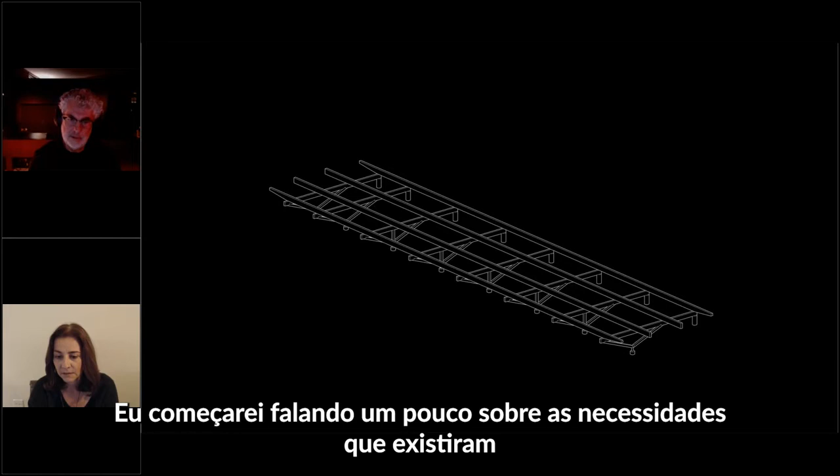I will start talking about the necessity of being in a remote piece of land that was totally disconnected from any water or electricity supply. Sustainability was something that was necessary, so the first thing, when we thought about how to assemble the house, was to create a structure that could be fully produced in a factory and then brought to the site and assembled in a very fast and clean way.

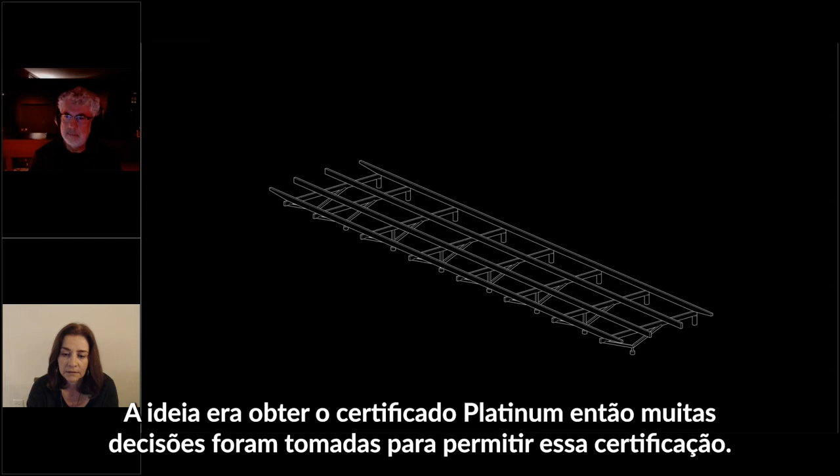The idea was to reach the platinum certification, so many decisions were taken to allow this certification to happen. The first thing was to keep the land in a very permeable way, so we touch the land in very few points. There are some concrete supports that hold the structure, and from those supports above, it's fully a wood structure.

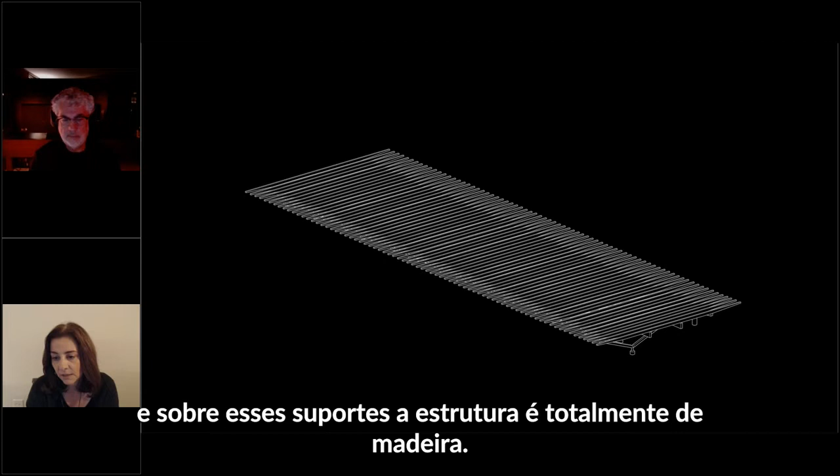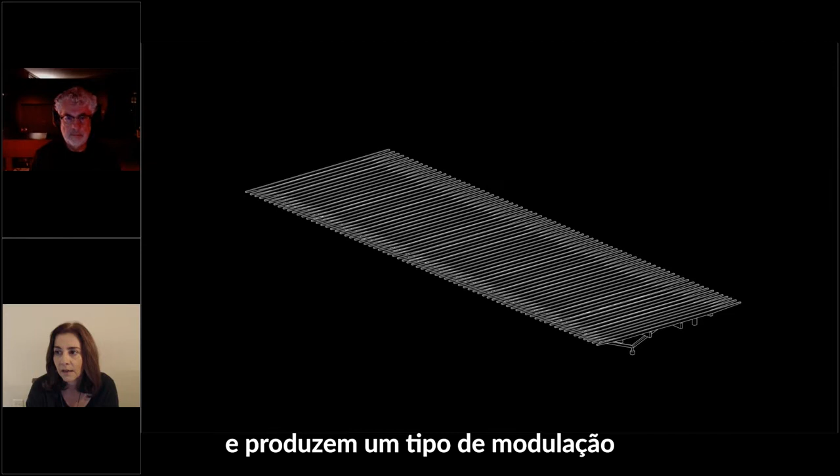The first slab is not a slab, it's a floor structure that holds almost the full house. From that floor structure we have the columns raising, producing a rhythm, a kind of modulation that can sustain and organize the program of the house. I think the slides are passing very slowly, I'm sorry about that. So now you see the full structure.

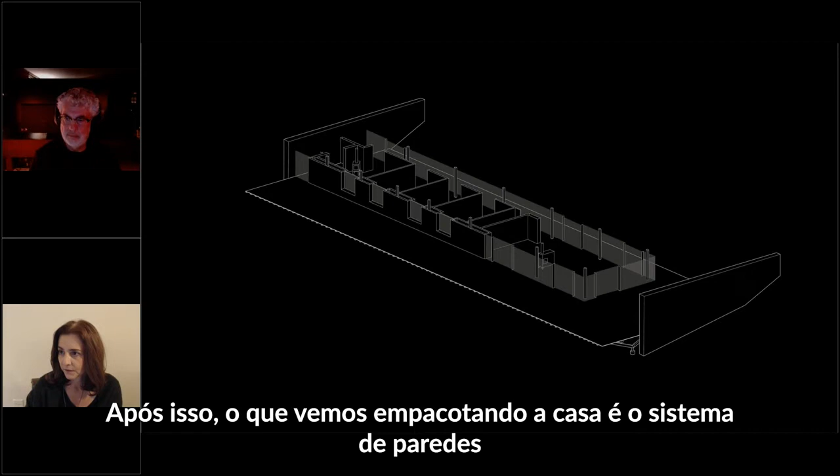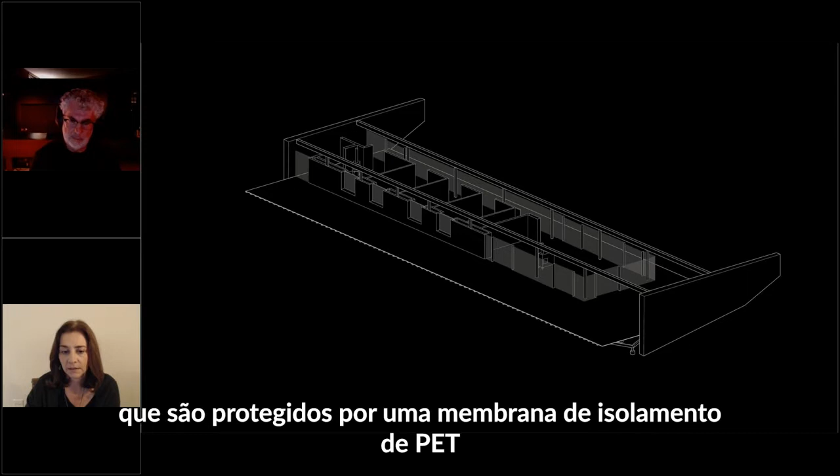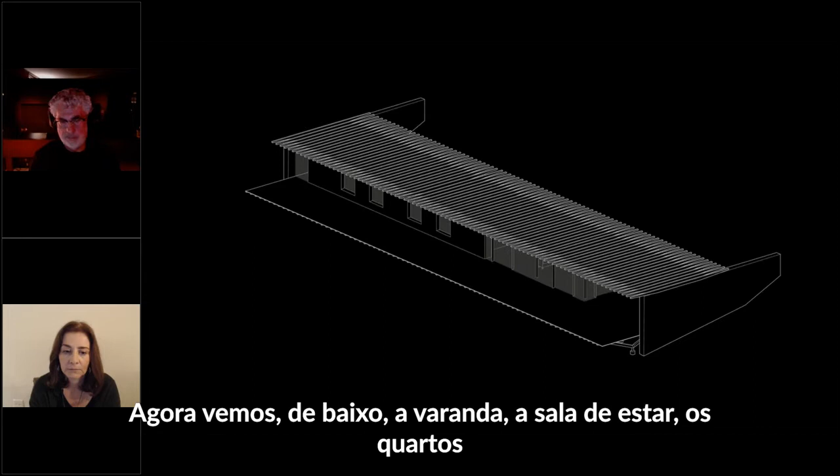And after that, what we see wrapping the house is the wall system. Those walls are also a wood paneling system protected by an insulation PET membrane that helps the insulation of the house. From those spaces we see, from the bottom, the veranda, the living area, bedrooms, and a big open space that is connected to the view.

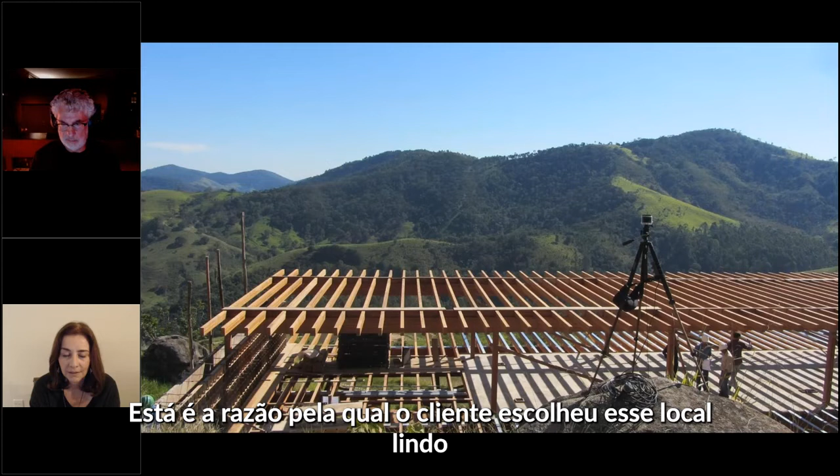This is the reason why the client chose this beautiful location. It's a mountain location with a beautiful view.

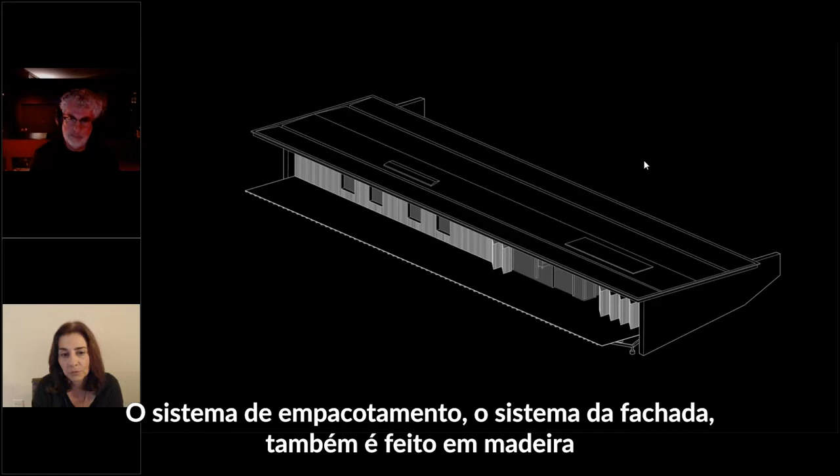The wrapping system, the facade system, is also in wood. We have sticks that clad both the solid parts of the walls and also protect and create a light filter in both the living and veranda areas. So this is the house floating in the mountains and floating towards the beautiful view.

So all the elements were in wood. Also, the glazing panels had a wooden frame around, and the decking area is fully permeable. Just in the internal areas of the house we see some cladding, some clad tiles on the floor. And the light filter, the light coming from the view, creates the full light effect on the facade.

The second example is the Micasa Volume C, located in São Paulo. The idea was to create a big cube, 15 by 15, without any columns in the center.

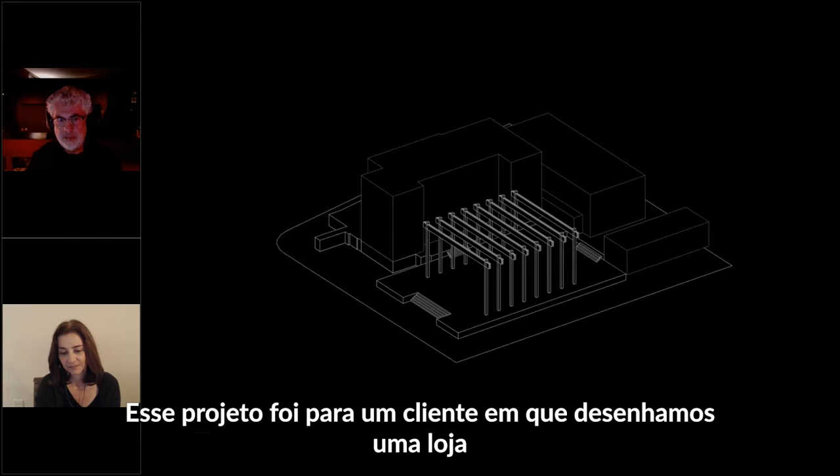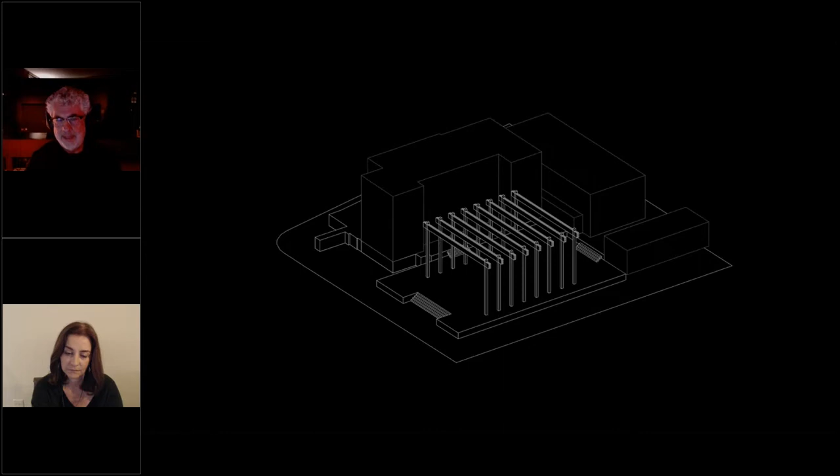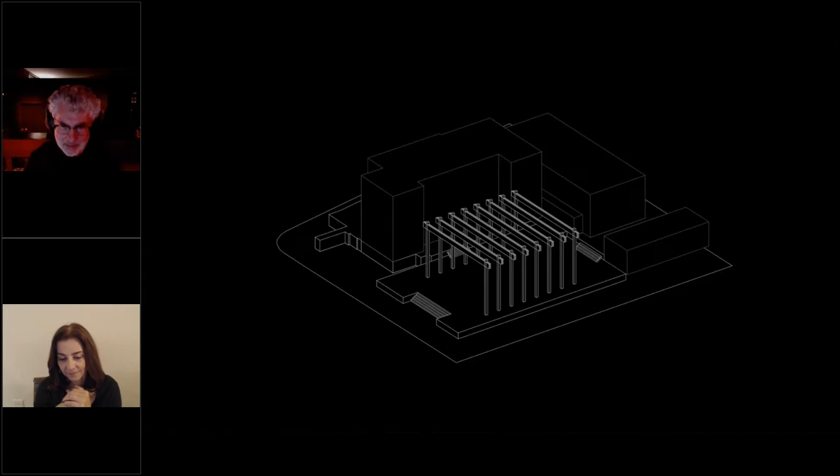This is for a client for whom we designed the shop, the other pavilion that was Volume B. In this case, the idea is to transform this space for different uses, like a shop, a gallery, a place for parties. The main idea in the beginning was to have a space for a kind of vintage motorhome, to be an artist residence that could work there. In the end, they decided not to have this element inside because it was too big, but it was prepared for it.

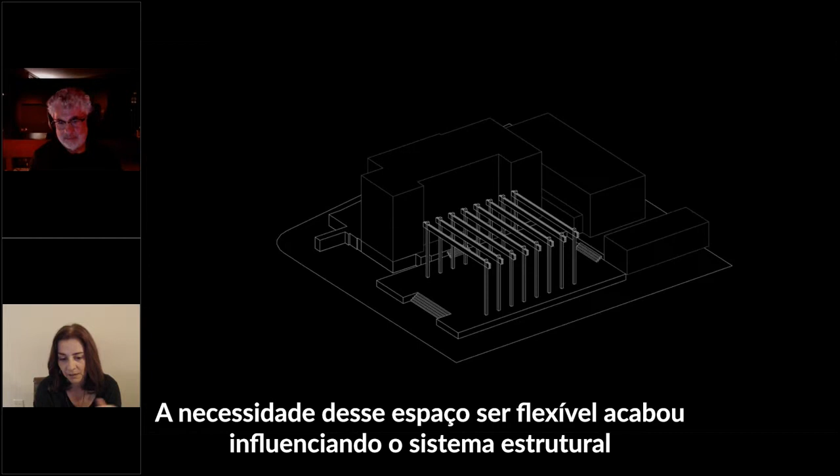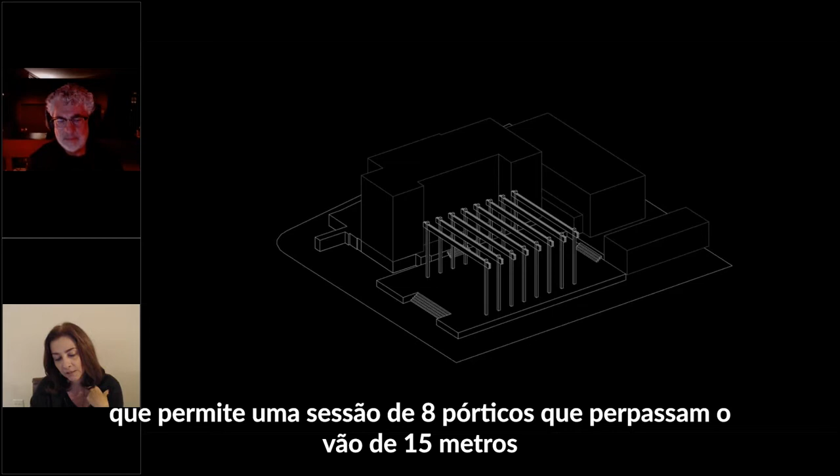The need for this flexible space has driven the structural system to allow a sequence of 8 portal frames that overcome a 15-meter span, and they can move a little bit, locked by an intermediate beam that also holds some extensions to hold the facade material.

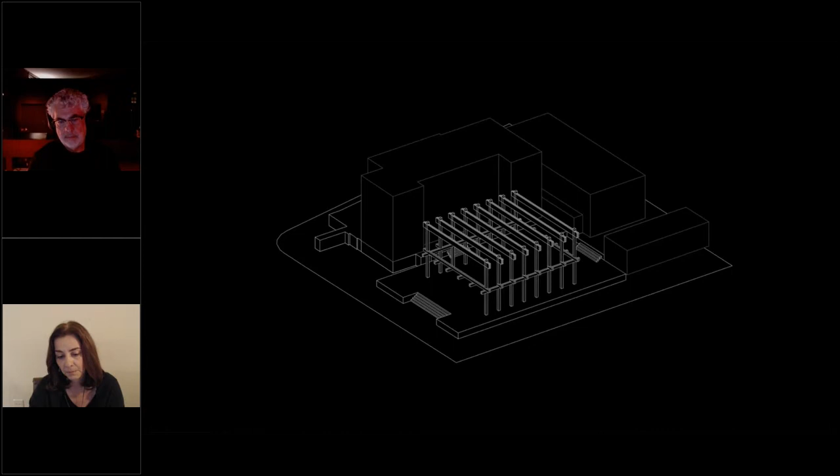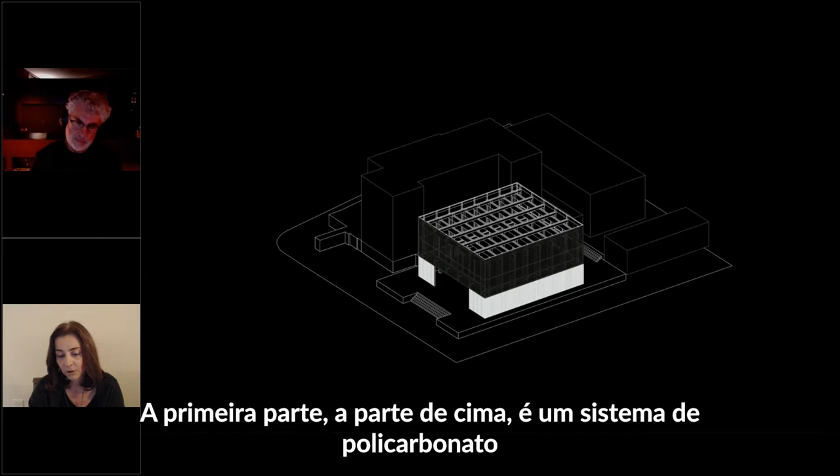The roof and the facade are kind of connected to this structure. The top part is a polycarbonate system that allows light to enter, translucent polycarbonate panels, and on the bottom you have corrugated metallic sheets that wrap the building.

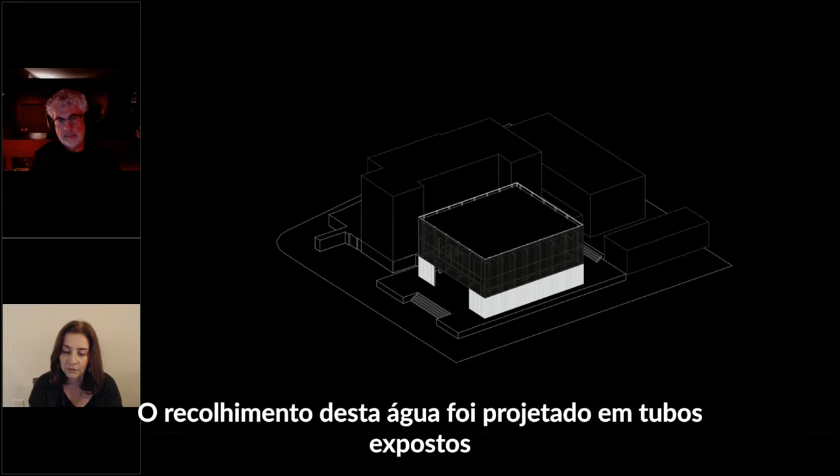On the top, we have wooden panels and just a membrane, a waterproofing membrane, and all the rainwater gutters run on the boundary of the building. The collection of this water was designed as exposed tubes that run behind the column, so you actually don't see them, but they are fully exposed.

It's important to say that this project and the previous one, the structure, was produced and designed by Carpinteria. So this is a case where the structure works like the interior space, right? It conforms the space and actually acts like the interior expression of the building.

The facade is just a wrapping system that protects from the rainwater, but the space is really written by the inside. So you see the connections between the beams and the columns, the metallic connection between the concrete floor and the wooden columns.

They were all designed very carefully in order to allow this design to be as minimalistic as possible. So the corner detail, with the double beam detail, supported by the columns and the corner.

This bracing cables and also the substructure that holds the polycarbonate facade outside. So again, you see this facade choice makes the light come inside during the day, but also makes the building turn into a lantern during the night.

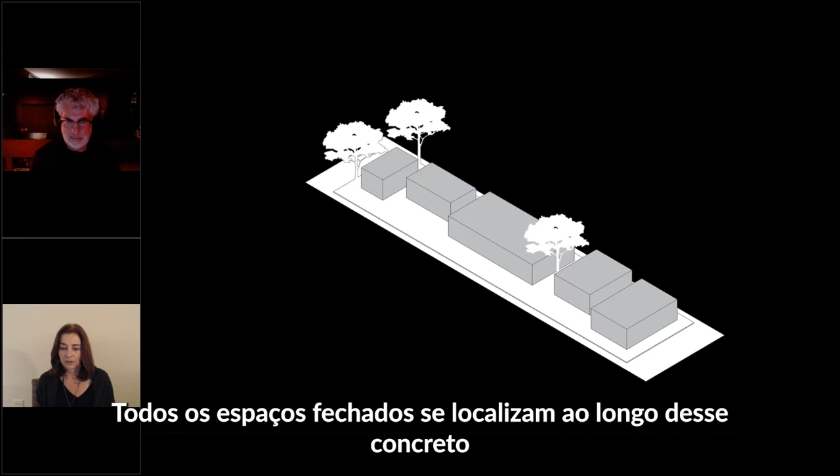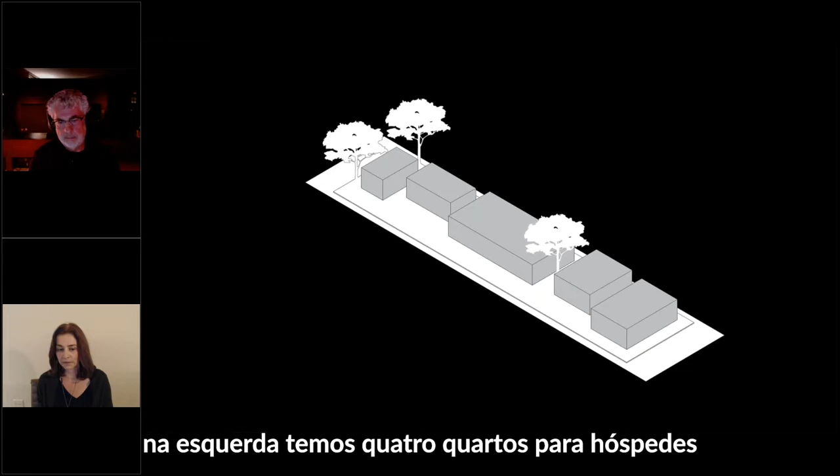All the enclosed spaces are along this decking area, and they are independent from each other. In the center, you have the master bedroom and living area. On the left, you have 4 guest bedrooms, and on the right, you have a dining area and kitchen.

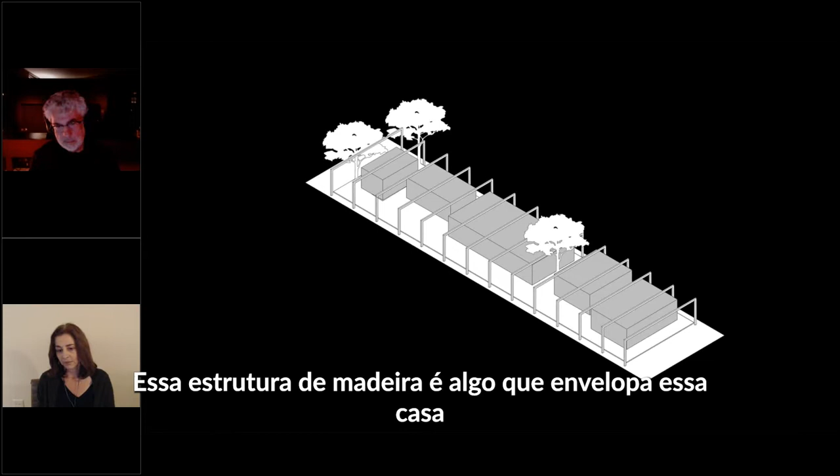This wooden structure is something that wraps this house and creates a sort of intermediate space between what is actually inside and what is outside.

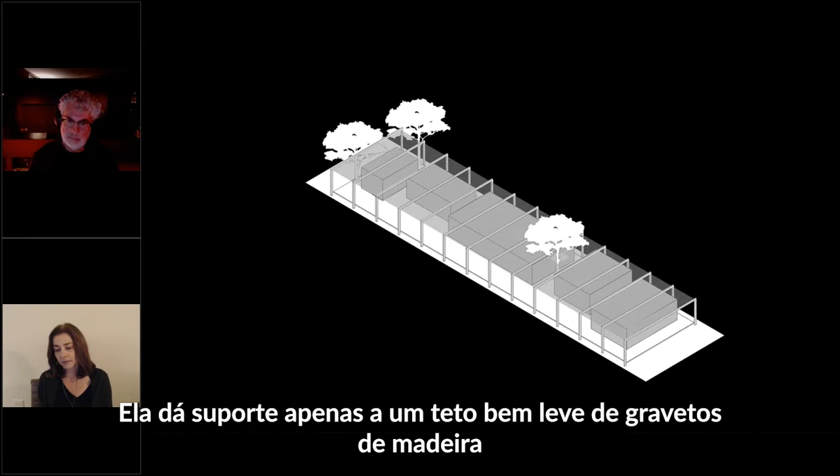It holds just supports a very light ceiling, a wooden stick ceiling that is not rain-proofed, but has a role to create shadow, like the trees that are around in the forest.

So this is the condition of the building. You have the building fully wrapped by the forest, and the role of this intermediate space is to create this in-between space of what is inside and what is fully outside.

So it's a place to chill out, to meet friends, to meet people at night, to have a guest, having a glass of wine. It's a space where you can enjoy nature and be outside, not in, as we are in the cities, but in Bahia you are allowed to be outside for many moments. It's a pleasant way, so the shadow is special in that sense, to create this space where you can be.

These shadows, these light effects, can touch the volumes and move, creating different expressions in different atmospheres during the day, but also very connected to the nature.

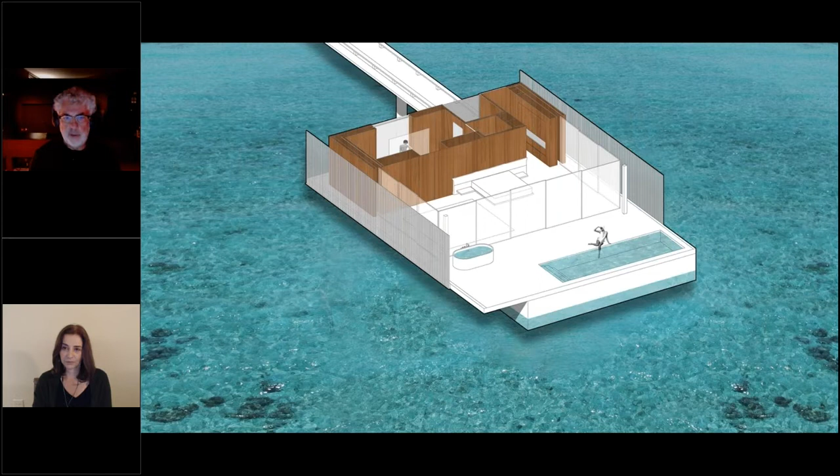We have some art pavilions in some place on the island, and this one is a James Turrell pavilion. Not this one - this is the room, but Renata will show the other one. That is a very interesting project we built.

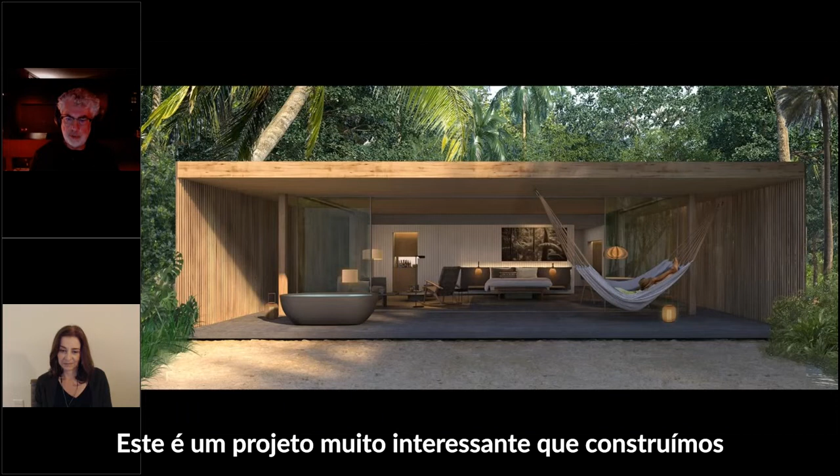I think the connection here with the first impression and the first desire that we had when we started designing the hotel was to create an architecture that could be embraced and surrounded by nature. We thought that this is a site where the nature, the light, the sea and the sand, everything is so overwhelming, so awesome, that it's very difficult to compete with it.

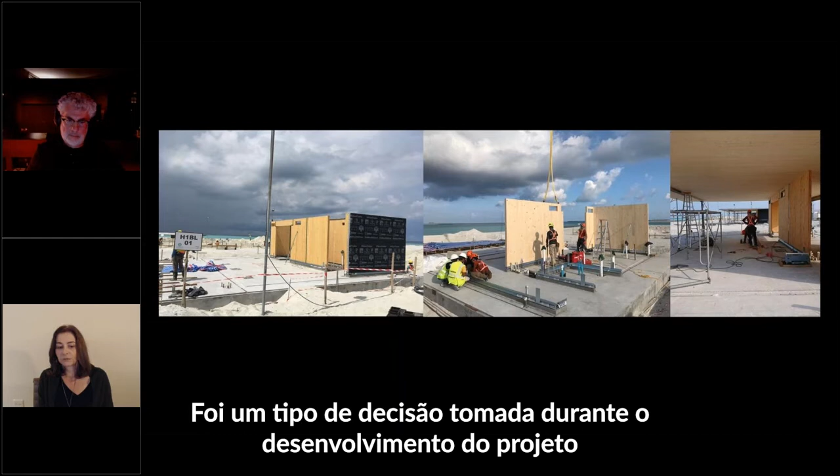the CLT panels could work not just as structural elements, but as a wall system as well. They would work as a wall system that could bring all the perforations for the air conditioning ducts, fully made at the factory. So everything was contributing to gaining speed in the construction. It proved to be a more cost-effective solution.

Our design was not prepared to show the CLT. It was not our first decision, and in the end it was exposed. But it was a lesson we learned about how to use the system to gain efficiency and speed in such a complicated, remote location and setting.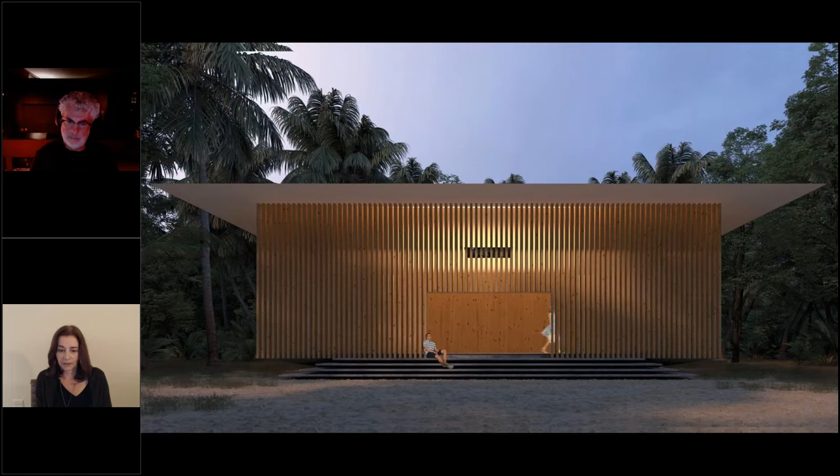And this is the James Turrell Pavilion, a totally different situation. In this situation, we've decided to show this structure. Actually, this is a site-specific piece for James Turrell.

It's a sky space, a space where you can enjoy this sort of disturbing view of the sky that you don't know if it's the sky or a painting, but it's actually a hole. So the main character here is the roof. The idea was to keep this structure on the boundaries and hold the roof without any columns. So the facade became the structure.

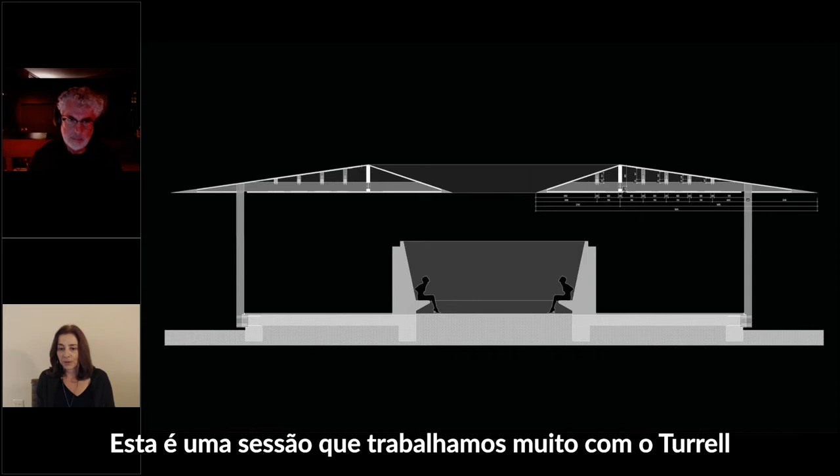This is a section we worked on with Turrell a lot, because it's a matter of proportions. All the roof structure is a wooden frame as well, with wood paneling and a liquid glass fiber system paint that gives this sort of unique surface without any junction lines. And this very thin edge is achieved by a metallic piece that is held both at the boundary of the roof and at the hole in the middle.

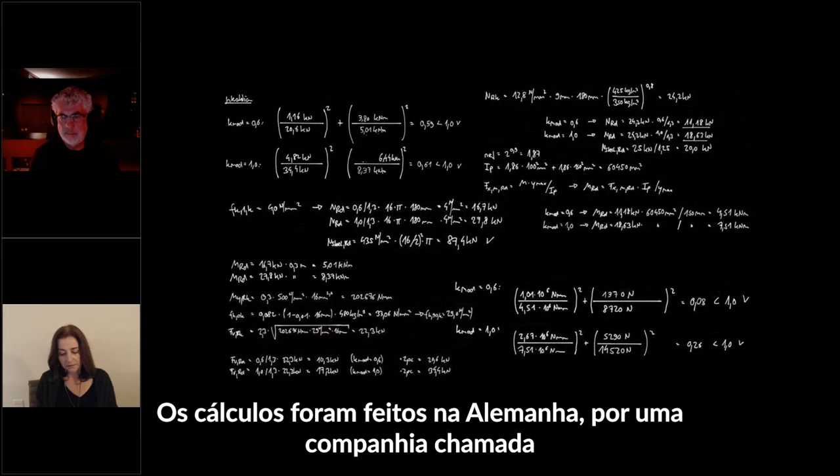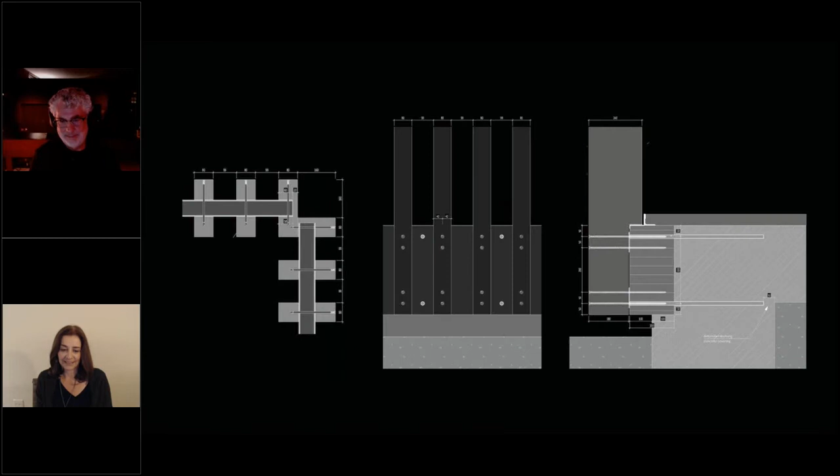It was calculated in Germany by a company called Kempter Fitz, and assembled by a Singaporean timber company called Ventured. So it was fully produced outside the site and just brought to the site in modules. The calculation was funny because besides all the digital material we received, we also received the review made by hand - so you could see that people are working, not just machines.

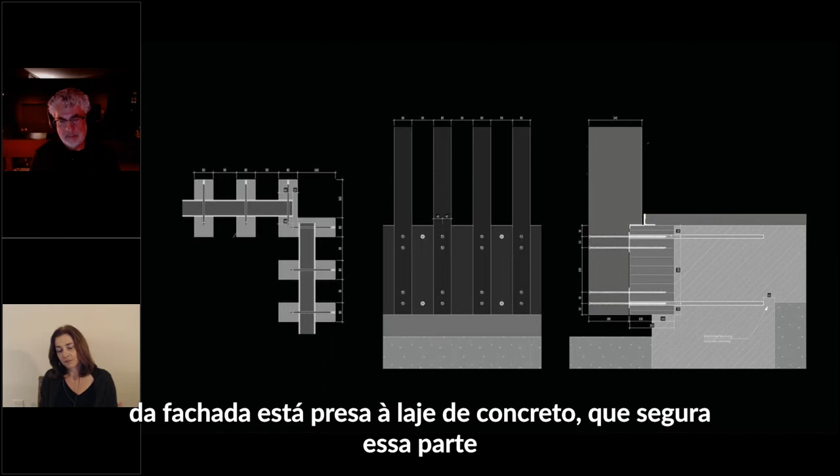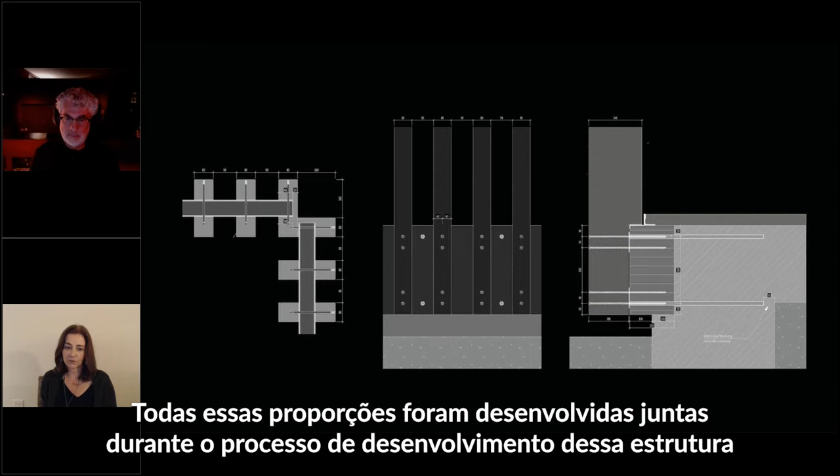This shows some details of the corner in plan, how the structure facade is attached to the concrete slab, which supports this piece. All these proportions were developed together during the process of developing the structure, because the structure itself became the facade material.

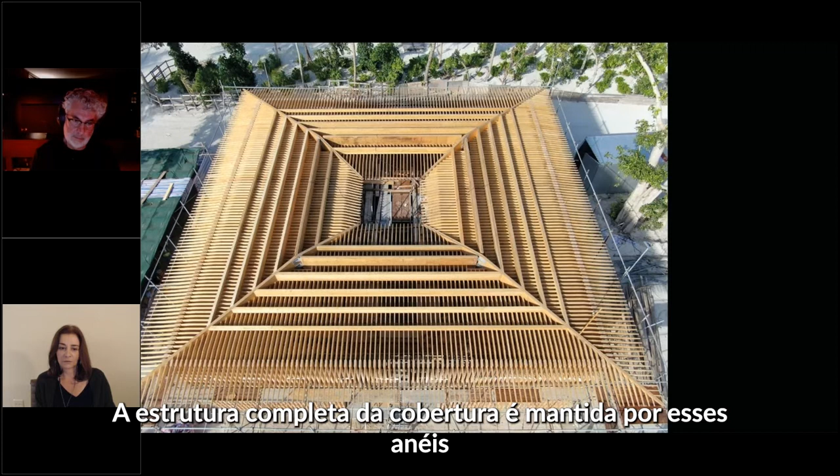And this is how they started the construction. They brought the panels in sections. The full roof structure is supported by those rings that bring the load to those diagonals and make it come to the facade line.

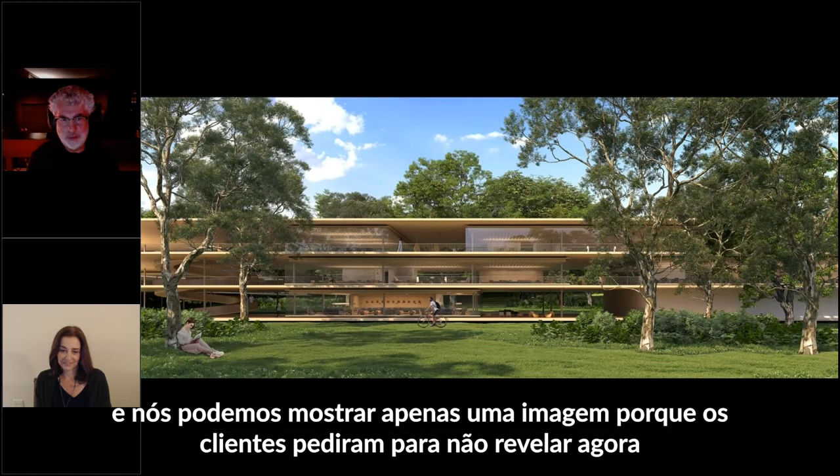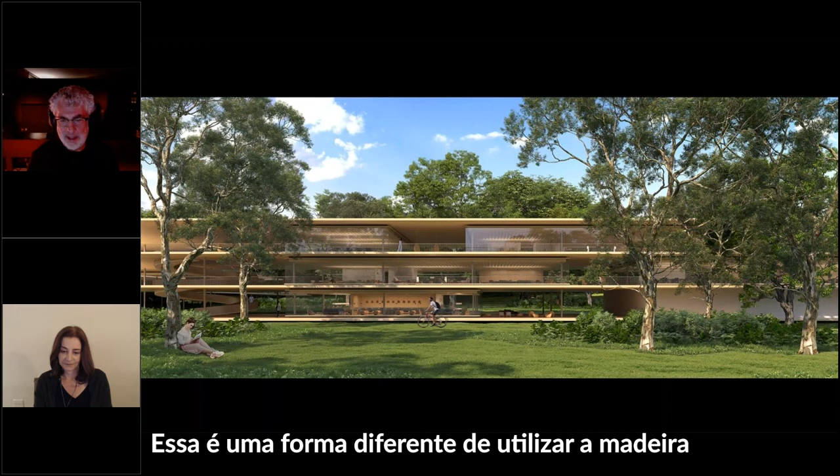The last project is one we're doing at this exact moment, and we can show just one image because the client asked us not to show it. I can't show it now because there will be an opening for the press to show the full project, and this is a different way of how to use wood.

Since the beginning it was about modulation, and we decided to use the CLT structure, the wooden structure, in modules so the building could be extended in a later moment, built in sections. The idea here was to produce an office space that could be fully connected to and surrounded by nature.

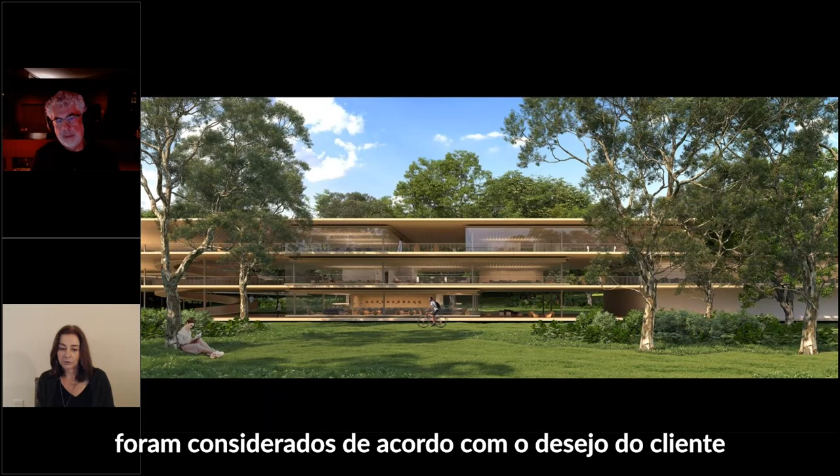At the same time, wood was brought to the project as a sustainable element, because we wanted not just the efficiency of construction speed and reduced waste in construction - all those construction points that are raised - but also to meet the client's desire for a fully sustainable project. So all the solutions were driven in that direction.

And I believe it will be a very nice project in the future. We are moving in this direction.

So that's it. I just want to say one thing to Kengo Kuma. We met in New Orleans exactly 10 years ago - it was May 20, 2011 - and since then we've met several times around the world. I'd like to say one thing: he's not only a great architect, a top architect, but more important than this, he's a great man, a great guy. That's it.

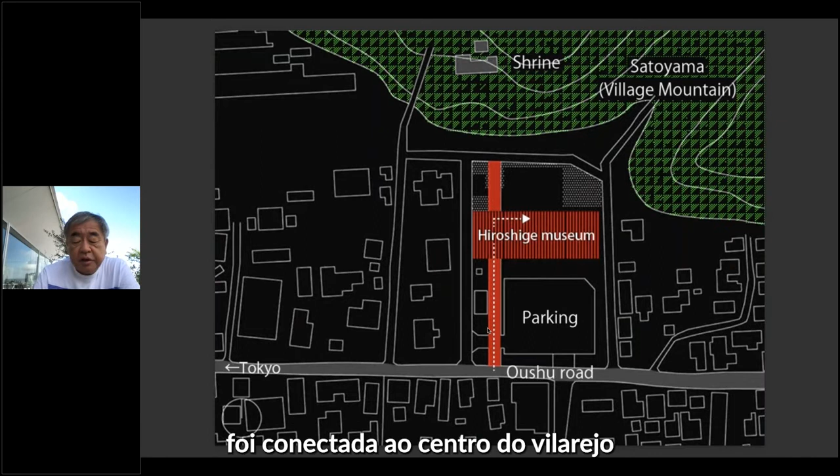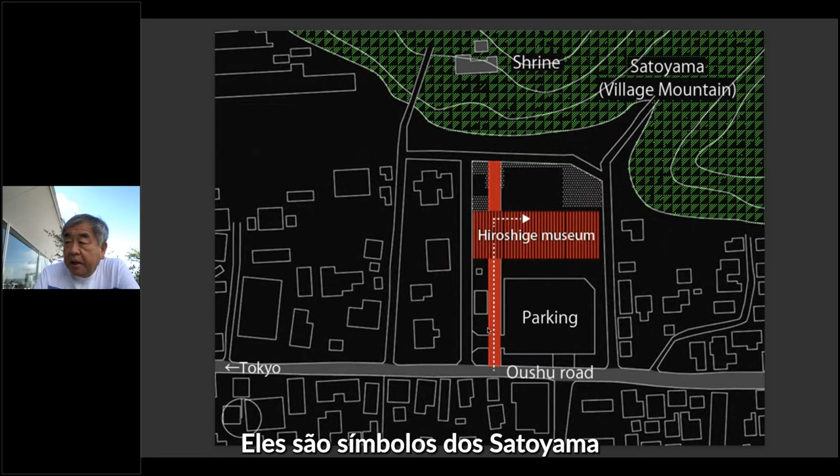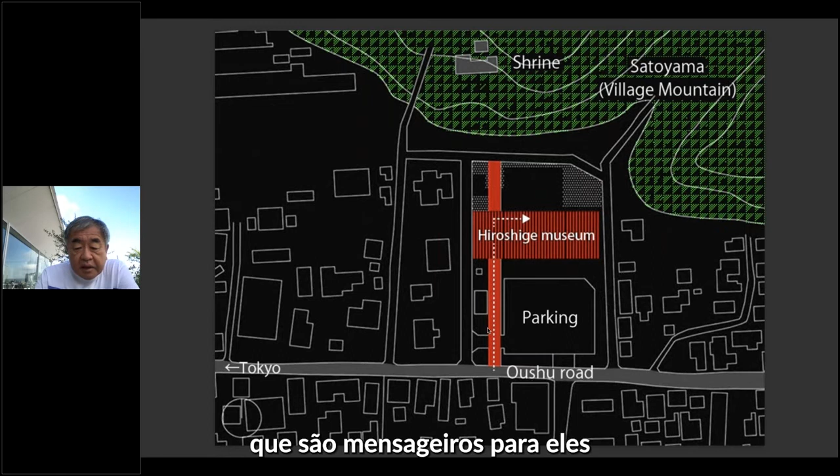In that project we cut the building to connect the Satoyama and the village center again. This is a hole we cut into the building, and through this hole the mountain behind, a green zone, and the village center was reconnected. At the edge of Satoyama the people always built a shrine. The shrine was a symbol of Satoyama, and the people respect the god of Satoyama, so they always built a shrine, and the shrine sends a message to them.

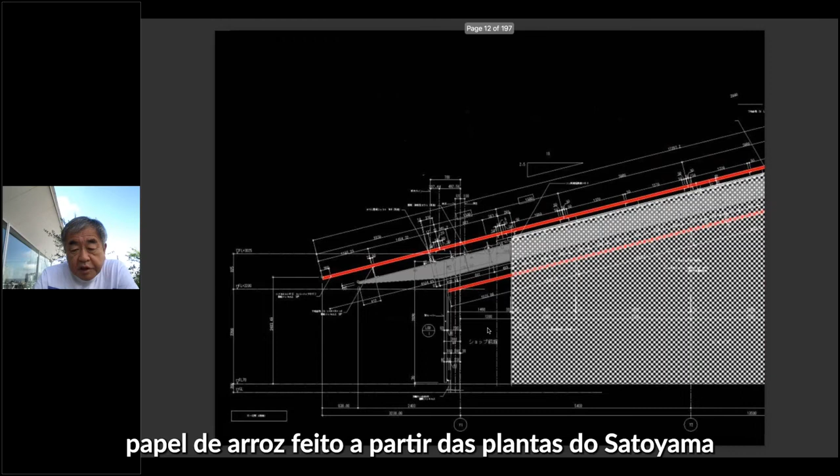Material-wise, we used Satoyama wood and rice papers that came from Satoyama plants, and also stone from the quarry of Satoyama. We also worked with the craftsmen living in the village. As for the roof, we also could use wood, as it's a new technology coming from the tradition of the thatched roof of Japan.

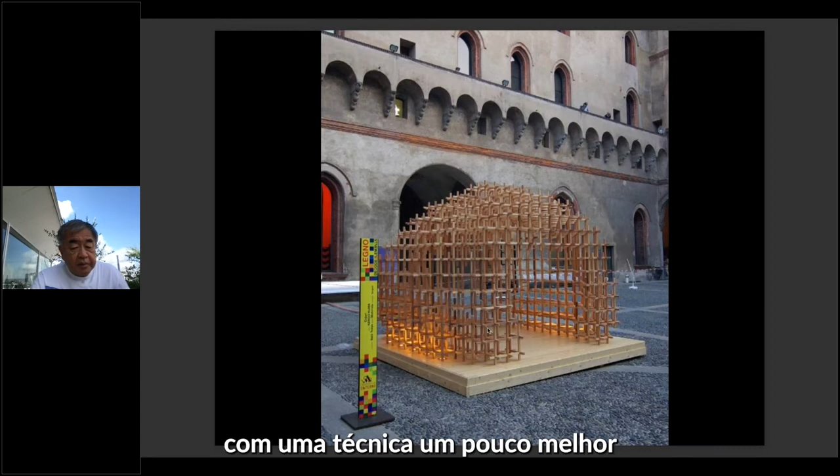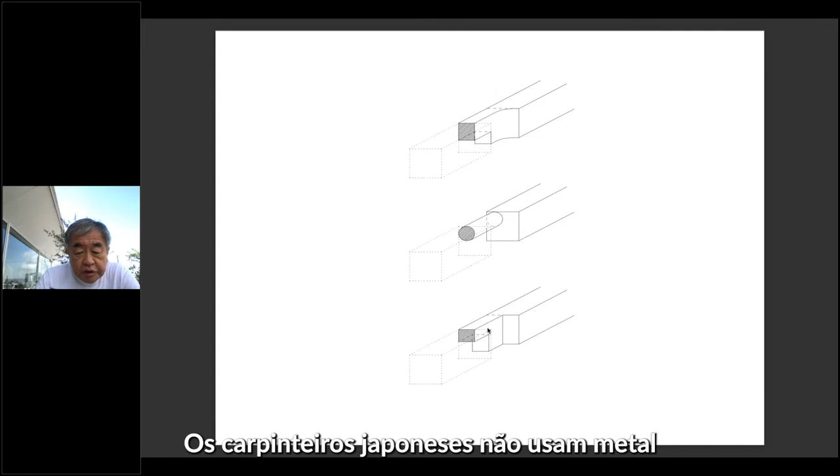This is a small pavilion we did in Italy, but the technique came from the old traditional joinery system of Japan. The Japanese carpenters didn't use metal, and always cut the wood like this to make it fixed. The dimension of the wood is 3 centimeters by 3 centimeters, but it's supporting the small pavilion.

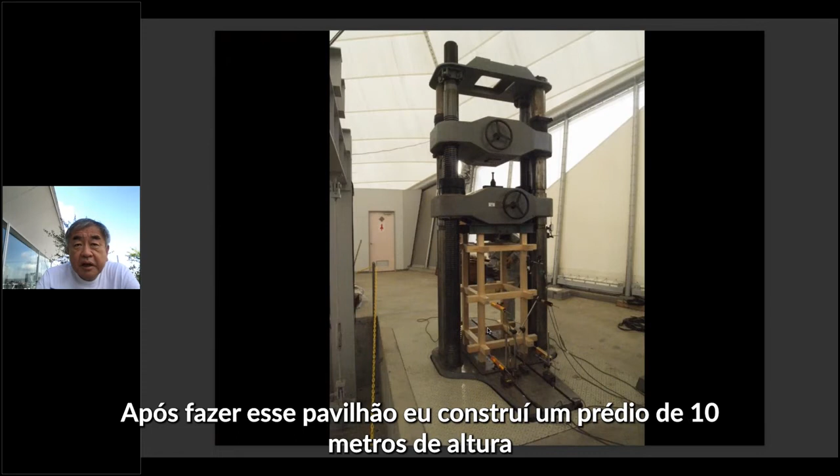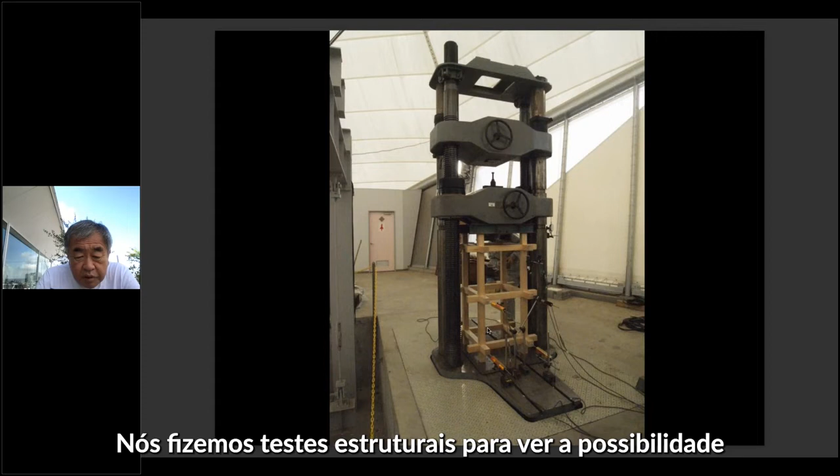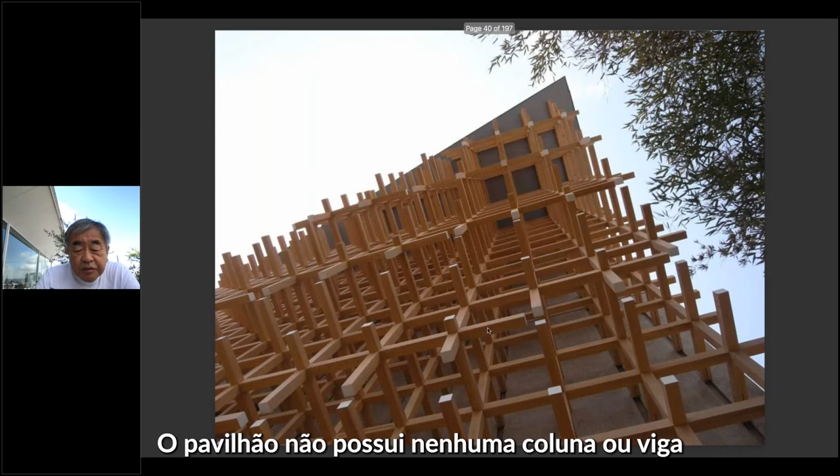After coming back from this pavilion, I built a 10 meters high building using the same system. We tested the structural possibility of this joint system, and finally a 6 centimeter by 6 centimeter grid is supporting this 10 meter pavilion. So there's no column and no beams, and only the grid is supporting the building.

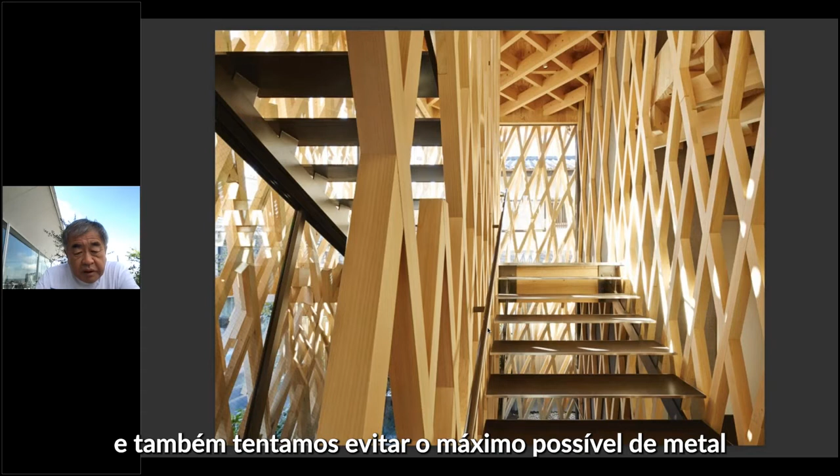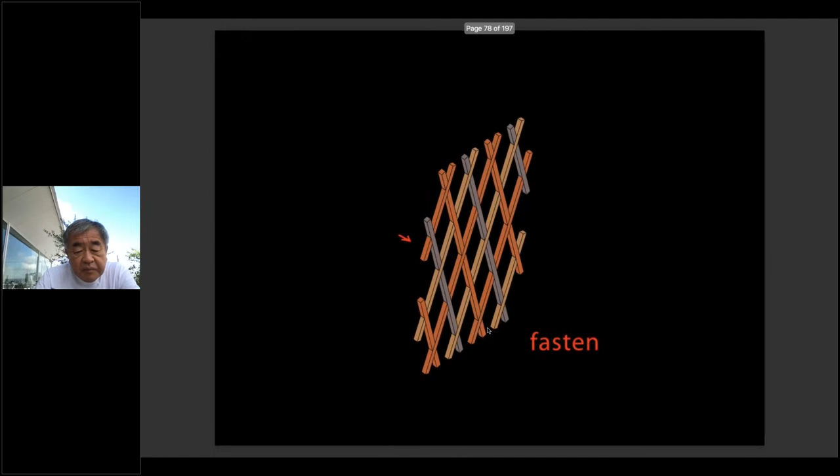After the test of this Starbucks pavilion, we designed a 3-story building in the center of Tokyo. The dimensions again are 6 centimeters by 6 centimeters, and we try to avoid metal as much as possible. This is the system of joinery. Simply said, it's a 3-layered system - 2 layers is not strong because it's slidable, but 3 layers is not slidable, and it can fix the building easily.

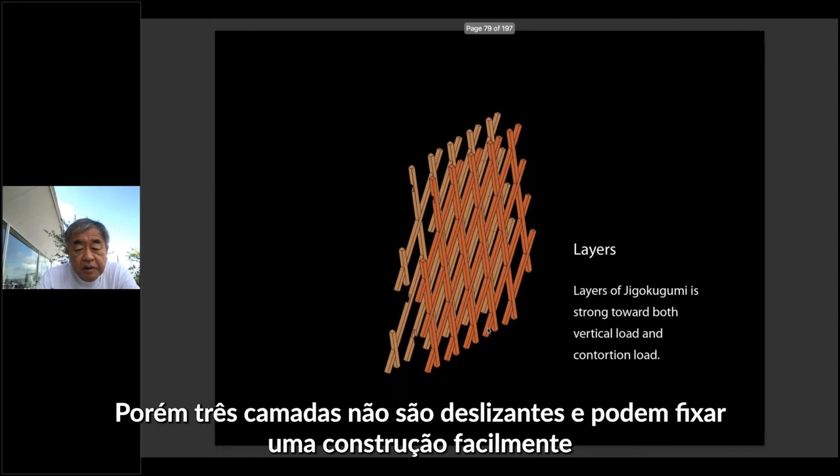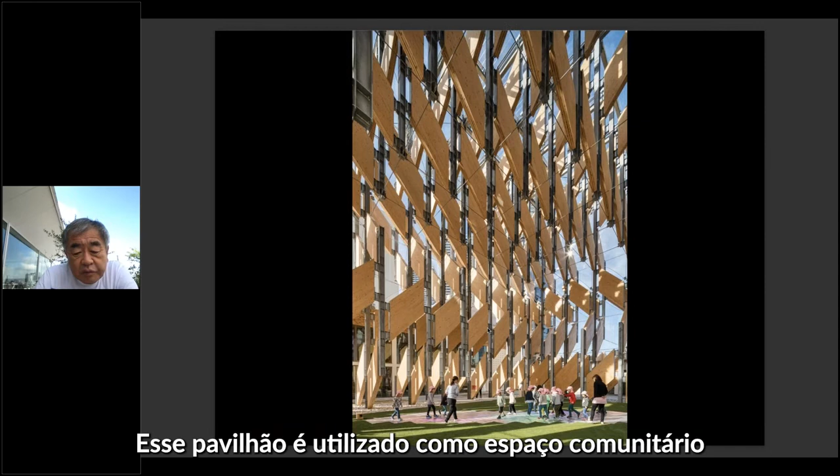Recently we are also working with CLT, in the CLT pavilion in Harumi. CLT is sometimes used for solid, enclosed buildings, but this CLT pavilion is very open and transparent. We combined CLT with steel beams to create this open feeling. This pavilion is used for community purposes, and the kids are enjoying this pavilion.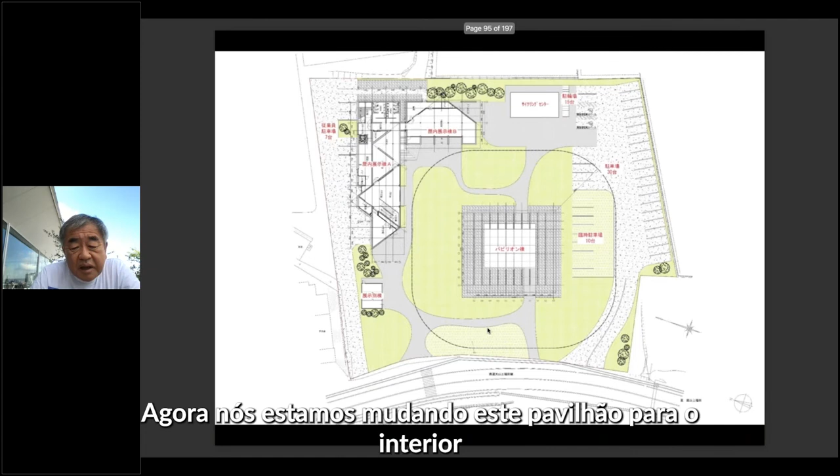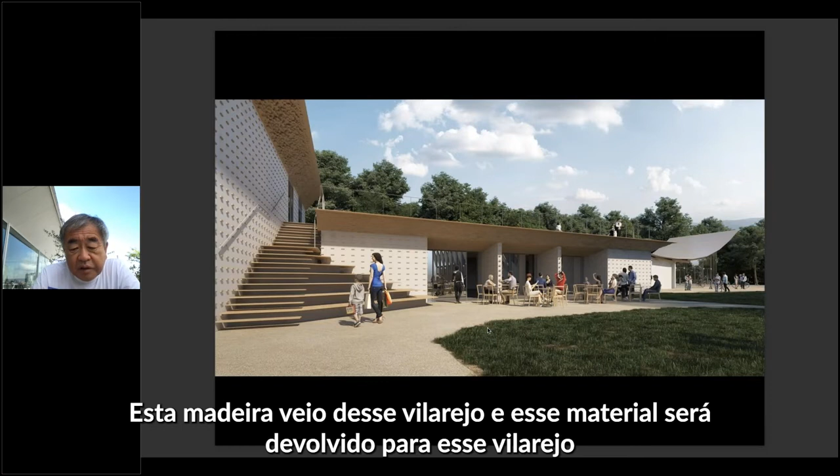Adjacent to this pavilion we designed a small wooden museum. The stairs and the furniture are all made from the same wood. Now we are moving this pavilion to the countryside. This wood came from this village, and we returned the material to the village. They want to use this as a new community center.

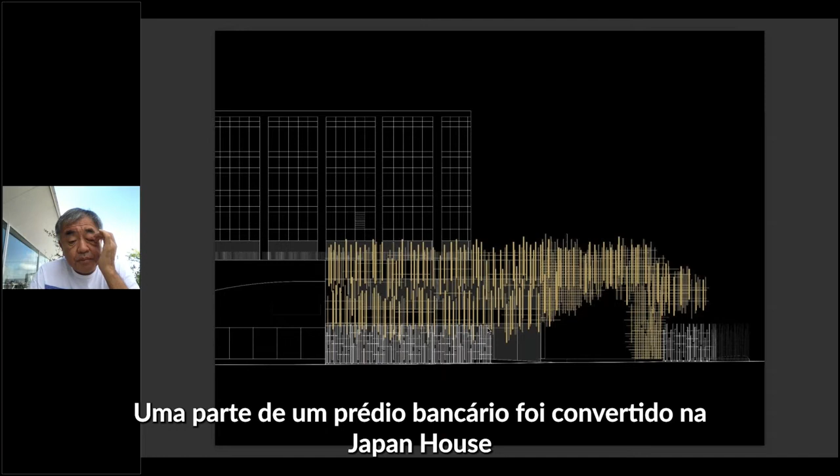In Sao Paulo, we luckily designed Japan House. In São Paulo, facing Paulista Avenue, part of a bank building was converted to Japan House, and we worked with Japanese carpenters, combining Japanese wood and Brazilian wood.

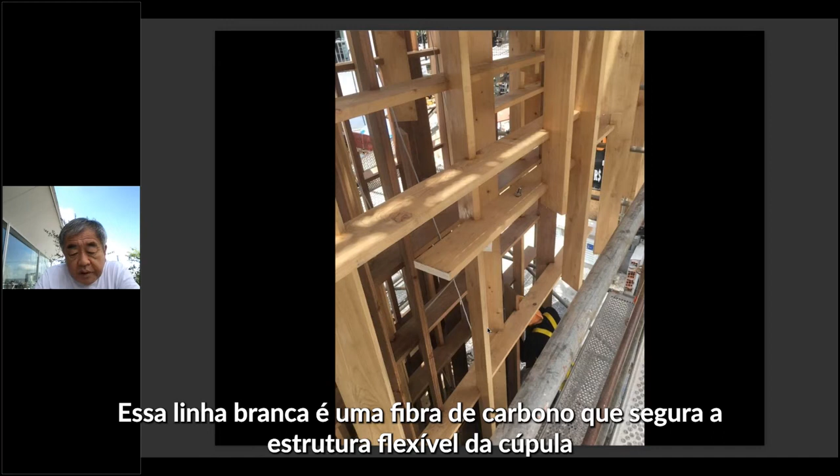The dark color came from Brazil, as a symbol of exchange between Japan and Brazil. The white string is carbon fiber, supporting the wooden structure. For interiors, we use this as a screen, a metal mesh with rice paper liquid. Craftsmen came to Brazil and worked with young Brazilian workers to create this unique screen.

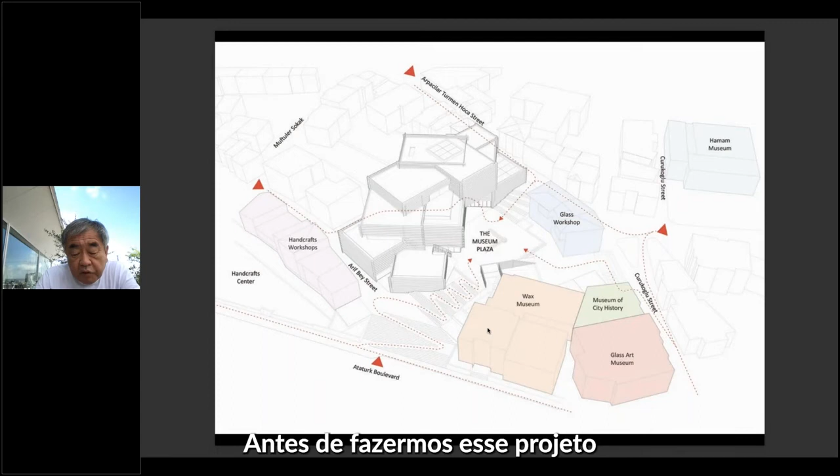This is a bamboo sculpture, also a very unique technique. There's no glue, no metal. In Turkey, we also work with local material. This is a museum. Before working on this project, we thought Turkey was a country of stone and brick, but historically, in the Ottoman period, they were building wooden buildings.

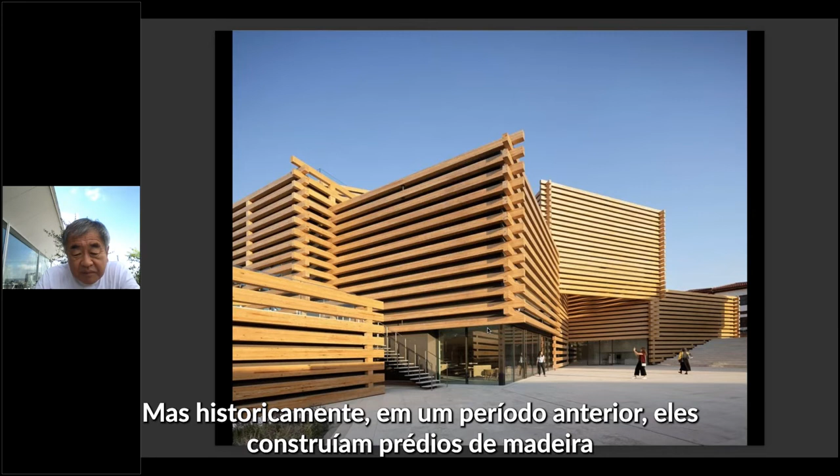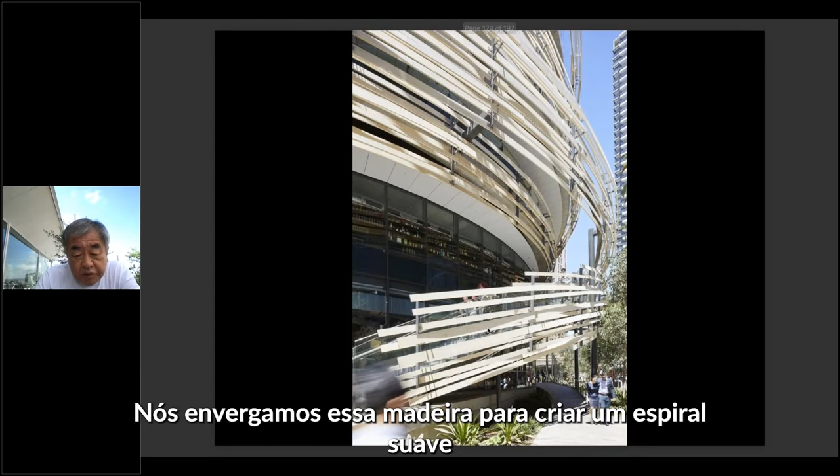In Australia, we designed this as a community center. We bent the wood to create a soft spiral, because we thought softness is very much needed in the city. Most new buildings in Australia are high-rise residences, and the density of high-rise residence is not so comfortable for a big city, we thought. This community center is a combination of a small market, kindergartens, a community library, and restaurants.

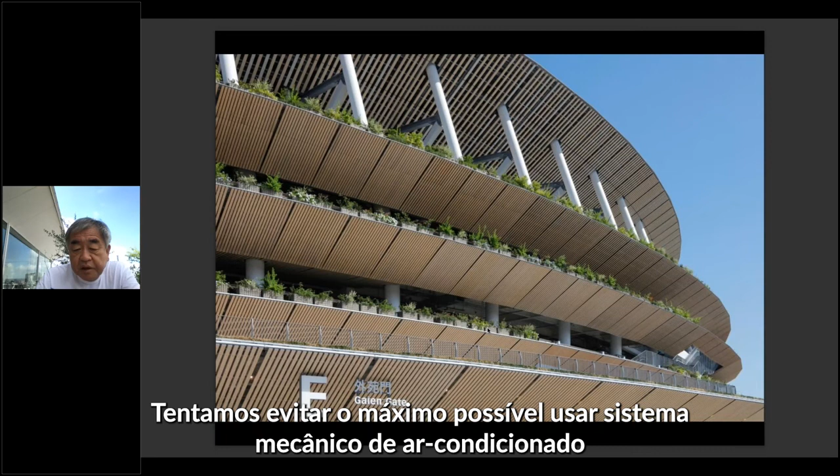And as for the stadium, the Olympics is planned to open next month in July, but nobody knows if it really can be opened or not. We designed the stadium made by wood, using wood from every prefecture of Japan. Japan has 47 prefectures; for the south side we used wood from the south, and the north facade uses wood from the north. We also try to combine wood and vegetation to bring the breeze into the building, trying to avoid mechanical air conditioning systems as much as possible. Wood sometimes works as a filter to control the natural wind coming into the building.

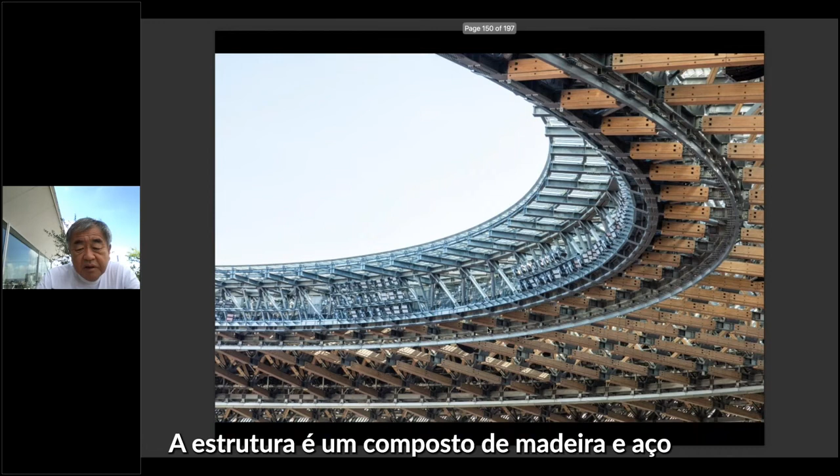The section is the same as a famous temple, a pagoda. The layers of the roof protect the building from natural light and bring wind to the depths of the building. Wood is good for this kind of public building, we think. The structure is a composite of steel and wood. It looks like it's full of people, but actually it's empty, because the colors of the seats are mosaic, making it look fully occupied.

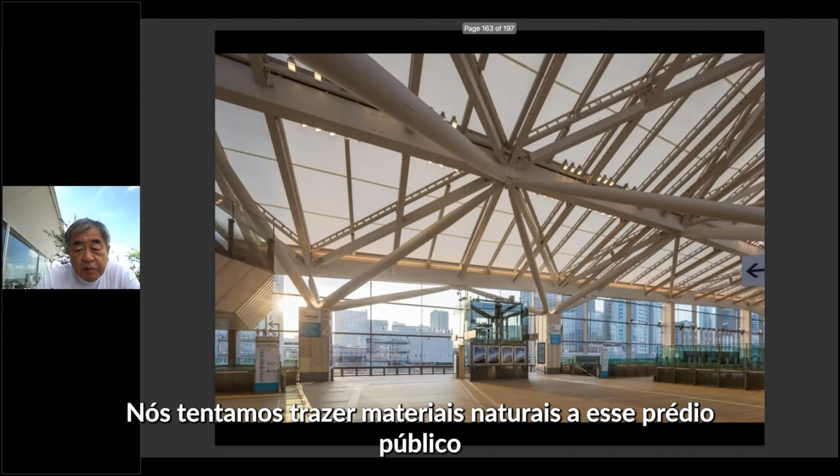And for the station, we also used wood. It is a big station in the center of Tokyo. We tried to bring natural material to this public building.

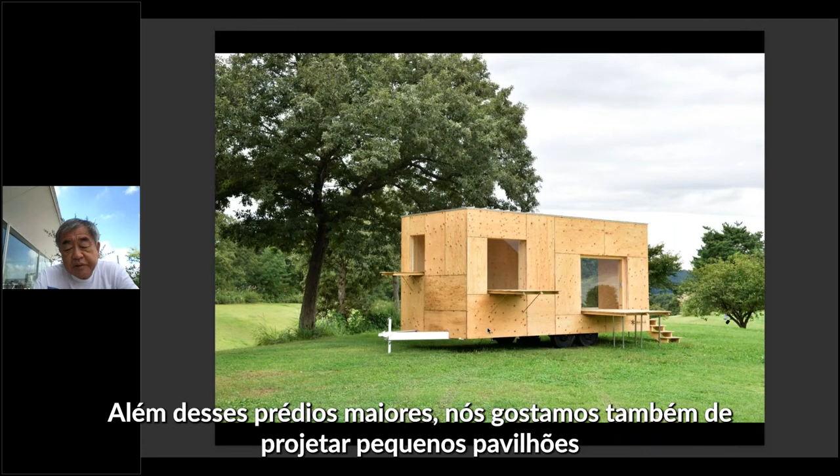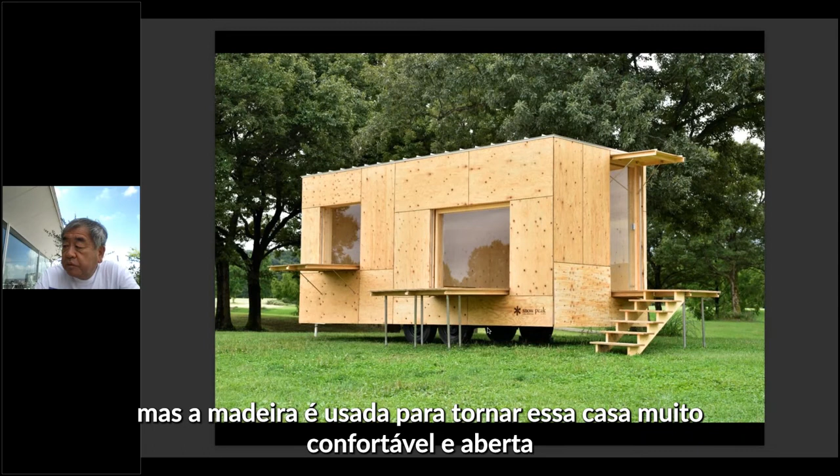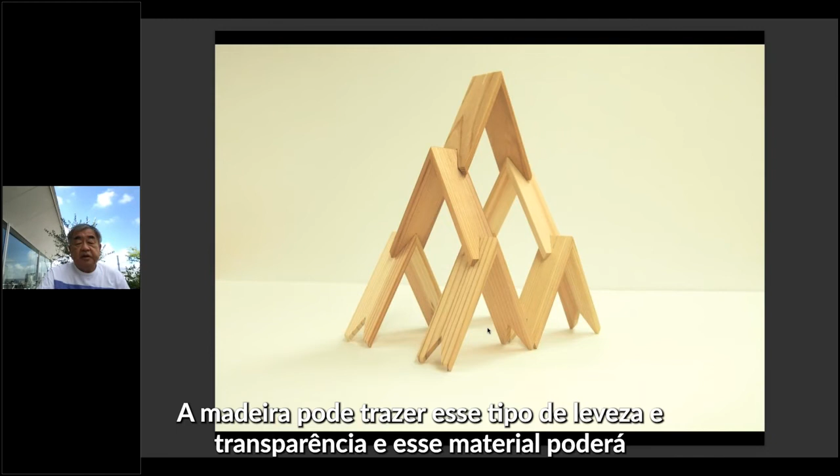We are also challenging this kind of new wood block. The Western wood block is a kind of brick, but this is a kind of Japanese wood block. It is very transparent and very light. Wood can make this kind of lightness and transparency, and I think this material can open the future after the pandemic. Thank you very much.